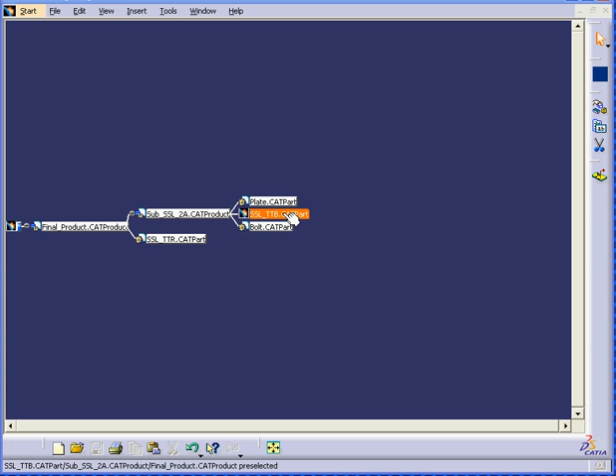We seem to be missing a part. Let's click the desk to go find it. Right-click on this part which appears to be missing. Select Find. And here's our part. Open it. Now let's close the desk. And here we have our components.

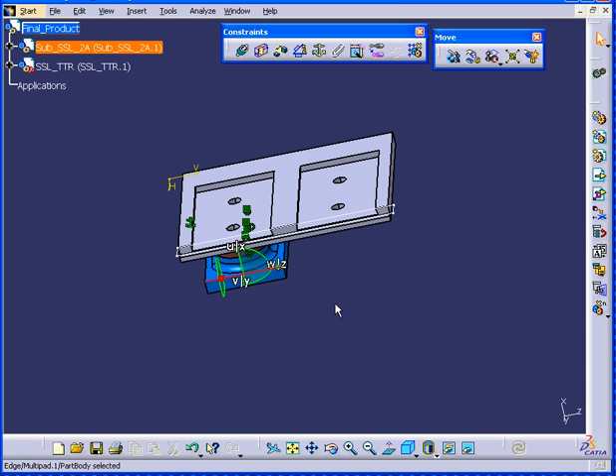Next, we're going to use the compass to position the components. Now we need two of these components for this assembly. Let's right-click and copy. Right-click and paste at the assembly level. You'll notice that when I copy, I click at the component level, but when I paste, it's at the assembly level.

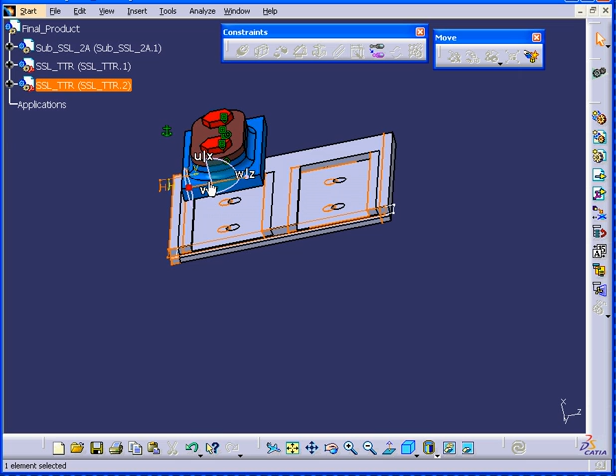Now on the component I just highlighted, let's move it. Oops, it's actually not highlighted. Okay, I see what's happened. I've copied the wrong component. All right, let's fix this. Right-click. Let's go back to the assembly level and delete the component.

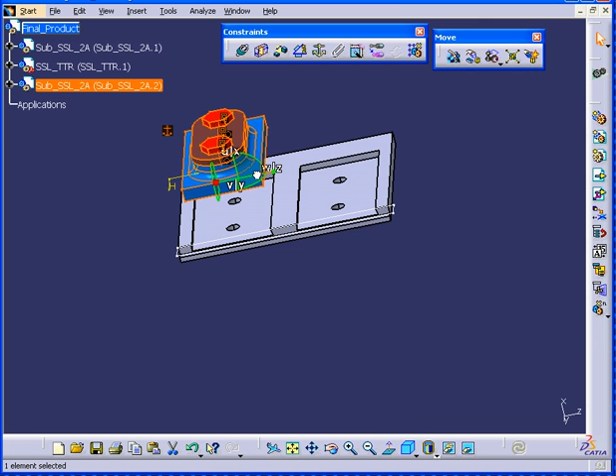Now let's go get the right one. Right-click, copy, and back to the assembly level where we paste it. Okay, now we've got the right component, and once it's selected, we can move it. Okay. Now let's rearrange our tree. Move it down, apply, click OK.

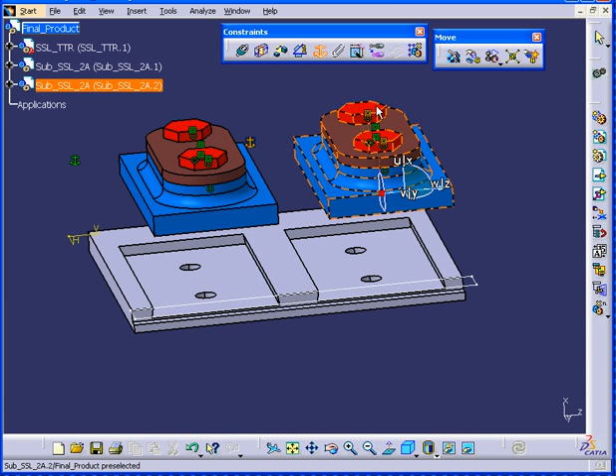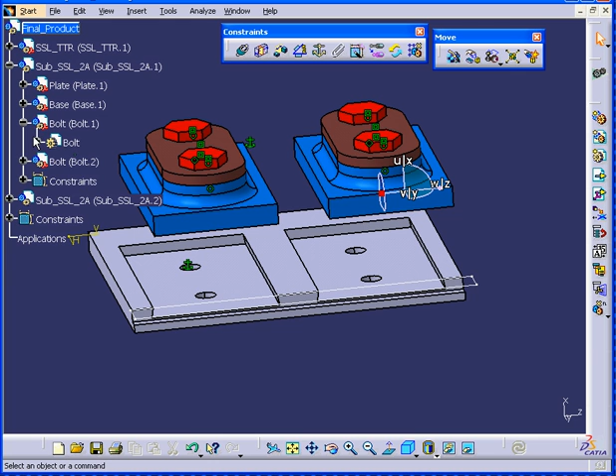Now let's use Fix Component and fix this component. We do need to hide these bolts. So let's right-click after we expand the specification tree. Selecting Hide/Show, one bolt is moved to No Show. But we do need all four to disappear, so let's bring this back. And let's go deeper to the part body level. Right-click, Hide/Show, and now as you can see, all four bolts are hidden.

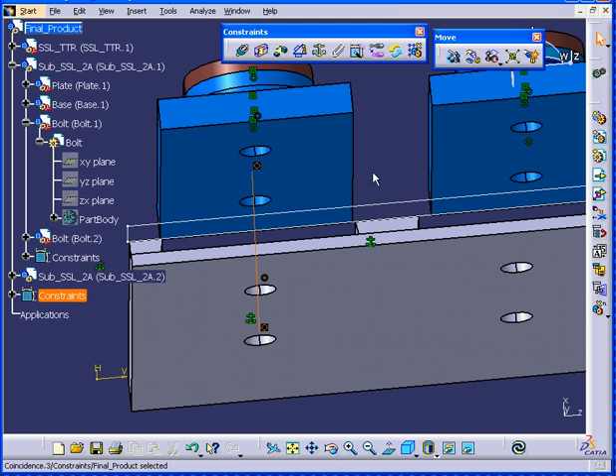All right, we're going to constrain our component now. First is the coincidence constraint, to constrain this hole to this hole. Second, this hole to this hole. Third, this hole to this hole. And lastly, this hole to this hole.

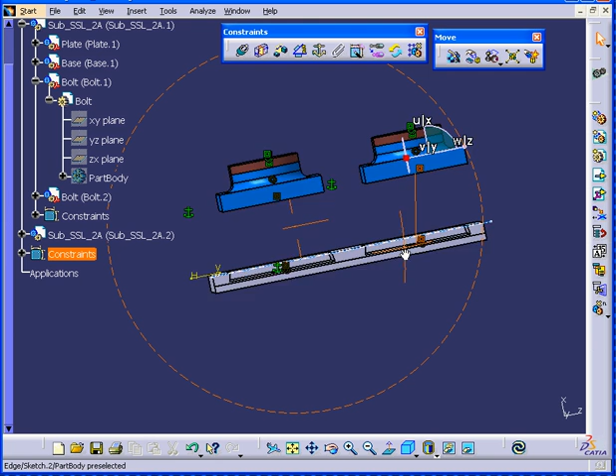Next, we will apply the contact constraint, this face to this face. This face to this face. Let's hit Update. As you can see, our components are constrained. All right, let's bring the bolts back. Right-click, toggle back to Show. OK.

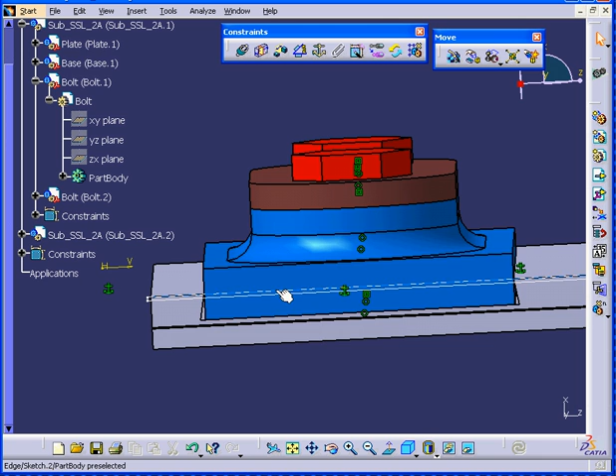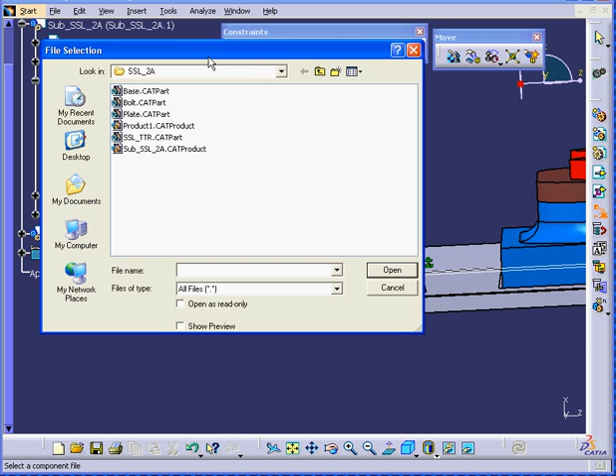We seem to have a problem here. It looks like this part doesn't match the base exactly. Well, let's replace this component. I can use the Replace Component function from the Product Structure toolbar. Or I can right-click on the component, select Components, select Replace Components. Now we navigate to find the right component and we open it.

CATIA prompts us, asking us if we want to replace all instances of the selected element. We will choose Yes and click OK. Now, as you can see, it fits perfectly with the base. Sometimes when you replace components, some constraints will get broken. If that happens, you will see a yellow exclamation mark in the specification tree next to the component.

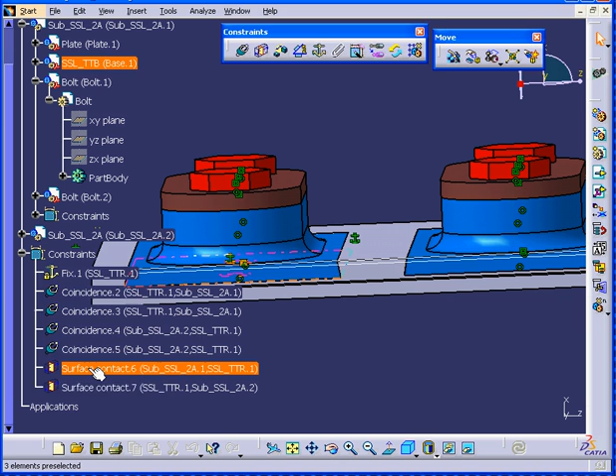When this happens, you have two choices. You can delete the constraint and create another, or you can double-click on the constraint and select More. And right here, you will see the word Disconnected. You'll need to click to reconnect and then click OK.

Next, I'd like to show you, let's collapse and expand the plate component. Okay. You'll see I'm in the Part Design workbench. I double-click on the plate at the part level. All right, let's add some chamfer to this part. Click on the edge, enter a value of 1/8 of an inch, hit Tab, and preview. When I click OK, you will see that the changes will be applied to this plate as well.

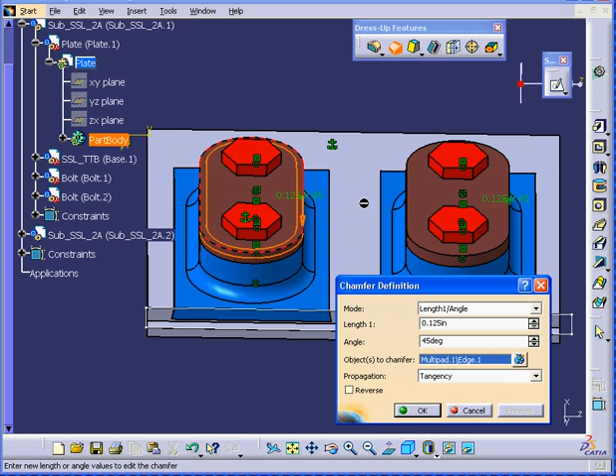As you can see, basically you can make adjustments at the part level anytime. After making your adjustments, you may go back to the assembly level and keep assembling your components. And this concludes our third tutorial on assembly.